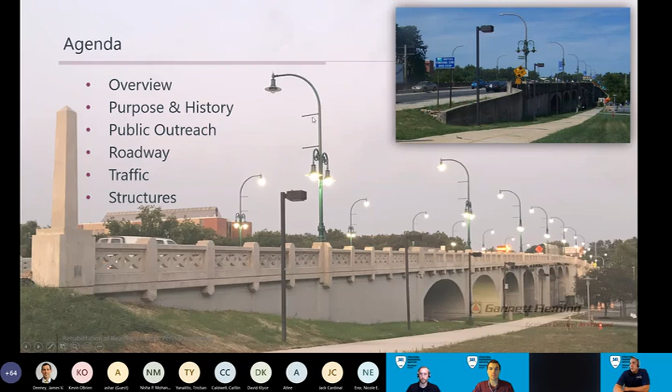So before I get into this, I just wanted to thank everybody that was involved in this. Without the help of everybody that's on this slide, and even some that aren't on here, this wouldn't have been as successful of a project as it was. First and foremost, PennDOT District 5, from the management, design, construction, inspection, everybody there, it was great in making this project successful.

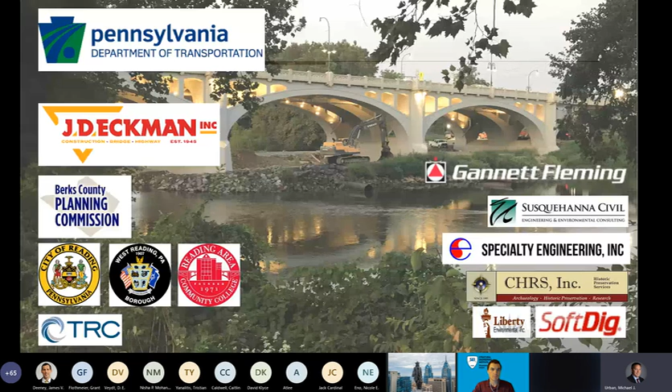For the design side on your right, Gannett Fleming was the prime, but just as important were our subs: Susquehanna Civil, Specialty, CHRS, Liberty, and SoftDig. During the planning and preliminary design portion of this project, Berks County Planning Commission, City of Reading, West Reading, and the Reading Area Community College, which is also you'll hear me say RACC, they were heavily involved in making this successful, as I said. And then onto construction, JD Eckman was the contractor and TRC was the construction inspector. I mean top to bottom, everybody, they made this project, this bridge, their own, and it showed when it was all done. So thanks to everybody for making this as successful as it's been.

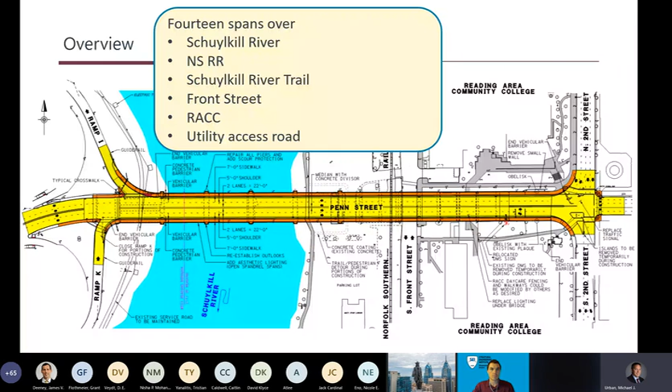Moving on to what the Penn Street Bridge is. Here's a plan view of the entire structure. It's actually 14 spans, crossing the Schuylkill River, the Norfolk Southern Railroad, the Schuylkill River Trail, Front Street, Reading Area Community College, and a utility access road.

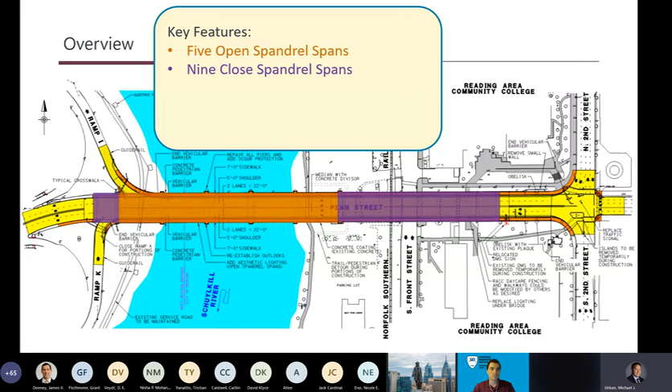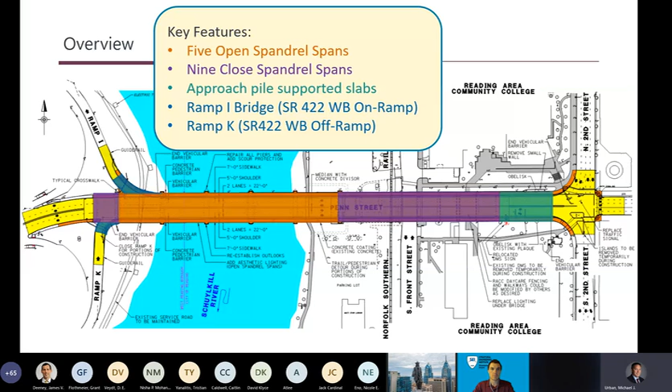The purpose of this bridge project was to rehabilitate the structurally deficient bridge to extend its useful life while preserving its character. This is listed on the National Register of Historic Places, so that was very important.

Then in 1948, after years of deterioration, they placed a gunite coating over the entire structure. They updated the roadway - there were trolleys, so they converted it just to cars. They removed the outlooks on the piers and added some drainage.

In 1958, they constructed the West Shore Bypass, which added Ramp I and Ramp K. In the 70s, they had obelisks with gaslight lamps that were removed to put in, at the time, modern light poles with overhead lighting.

And then finally in 2019, we had our rehabilitation and restoration of this bridge.

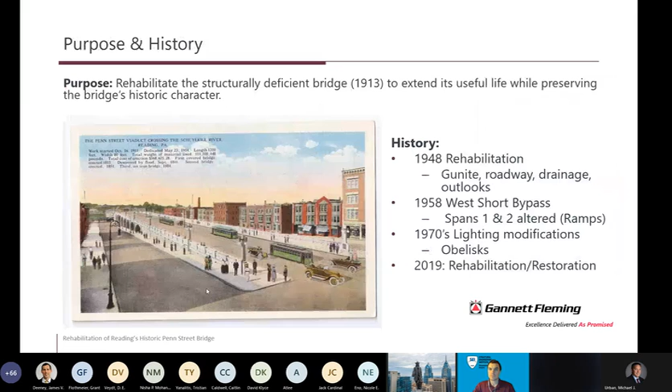As mentioned, this is eligible for the National Register of Historic Places. In Berks County, it's the oldest bridge of its type, and it's listed for the age, the type of construction, and its unique architecture. It's an open spandrel reinforced concrete arch bridge, with those 5 main spans.

Another important aspect is it has that reticulated pattern balustrade for a barrier. It has pedestrian outlooks and all the detailing on the fascia on the outside that you can see.

This bridge was part of the City Beautiful movement, which treated all the civic architecture, urban planning, and everything else to make it look nice. That's the purpose - that's why you have such a gorgeous looking bridge, and that's what they were trying to do at the time. So obviously we wanted to bring that back.

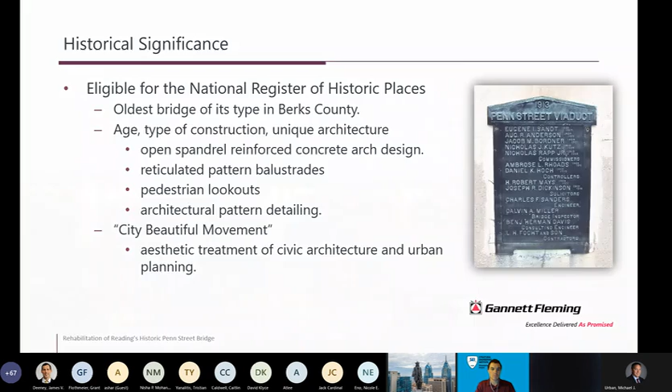In the early stages of design, public outreach was really important. There were consulting party meetings, public official meetings, and a plans display where the community could come in and see what we were doing. There were also adjacent projects - just upstream was the Buttonwood Bridge.

They also had the Wyomissing project, ADA sidewalks, lighting, and water line projects. So there was a lot going on, and we had to make sure we were incorporating our work with everything else.

One of the funniest things about this was, during design, there was actually a 100th birthday party for this bridge, where people in the community came out, had activities, had a cake, and actually sang happy birthday to the bridge. You could see how important this bridge was to the community.

They took pride in this, and from that point on we knew we had to take that into account and incorporate it respectfully into our design. We always wanted to stay on key to make sure we were returning this bridge to its original condition, while making sure everyone understood from top to bottom that this was a bridge project.

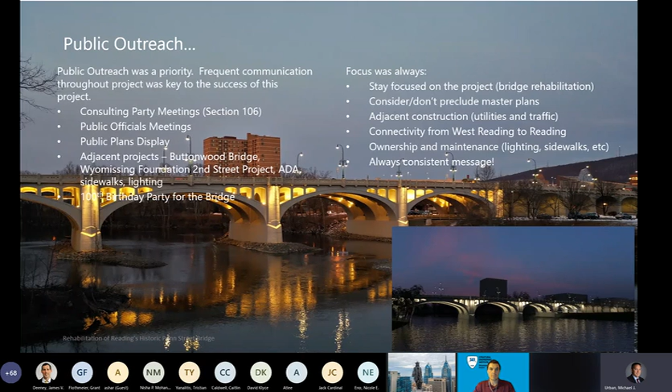Just before I skip over in the slide, when talking about the public plans display, in the bottom right you can see a rendering we did to show the lighting to the public, and the background shows the final product. It came out really nice.

When talking about stakeholder and public engagement, the Reading Eagle was the newspaper in the area, and we had a lot of talks with them. In the middle here, they had a full page spread of the bridge explaining everything going on, construction scheduling, detours. You can see in the upper left what the roadway was going to look like. It was about getting everybody involved so nobody was in the dark.

In addition, they also sent out flyers to all the residents of Reading. They wanted everybody to know that nothing was closing down, that Reading was still open. On the bottom right is one of the billboards they had, just to make sure everybody knew Reading wasn't closing down.

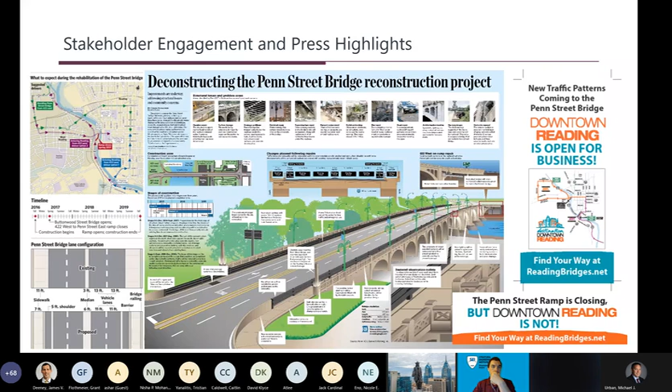Getting into the project, here's just an aerial before. Penn Street had an ADT of over 22,000 vehicles. You had the 422 interchange directly on the west side, and the 2nd Street intersection directly on the east of the structure. So this structure was flanked by the intersection and the interchange.

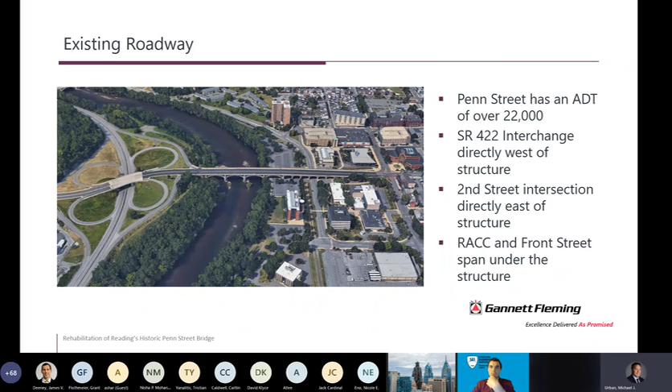It also crossed the RACC, which is on both the north and south side of the bridge over there on the east. They had parking lots and pedestrian crossings underneath some of the spans. So there was a lot of stuff going on on that Reading side.

Going into design, the existing cross section originally had 4 13-foot lanes, a 3-foot median, and 2 11-foot sidewalks. Those 13-foot lanes promoted a lot of speeding across. It's posted for 25, but with that long stretch of bridge and 13-foot lanes, you can imagine how fast people were going across.

Moving into the proposed section, one concern between consulting parties and public outreach was that they wanted some protection on the sidewalks. So in the final condition, we reduced the lane widths to 11 feet, giving us 4 11-foot lanes, a 6-foot median separating traffic, a 5-foot shoulder to further keep traffic away from pedestrians, a crash-worthy curb barrier, and 2 7-foot sidewalks.

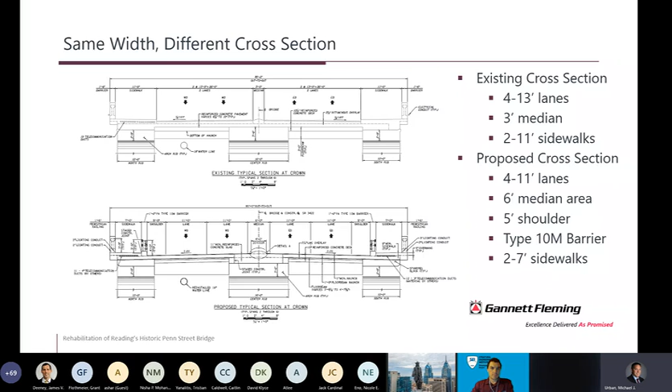That curb barrier allowed us to use a non-crash-worthy pedestrian barrier, which was the original design on the bridge, because we had to protect pedestrians while also having a crash-worthy barrier. Those 5-foot shoulders are wide enough that in the future they could become bike lanes, though at the time there were no facilities on either side of the bridge. We're not precluding those, and this way it's easy to stripe, and all the inlets have bicycle safety grates on them as well.

As mentioned, there was a lot of traffic. This is the main route into Reading from 422, so a lot of traffic, a lot of people going in. We had to do a study to determine how we could rehab this bridge and still maintain traffic. It was decided early on that we needed to maintain 3 lanes, so we had to knock one lane off. To do that, we took out ramp K, the off ramp of 422 onto Penn Street going in.

So we had 2 detours. One was further south prior to the bridge, and in case people not near the area missed that, we had another detour further north where they could come back around through West Reading and get back to the bridge. Again, it was about making sure everybody could get across where they needed to, and thinking ahead. Throughout, there was also some modification of the signal timings.

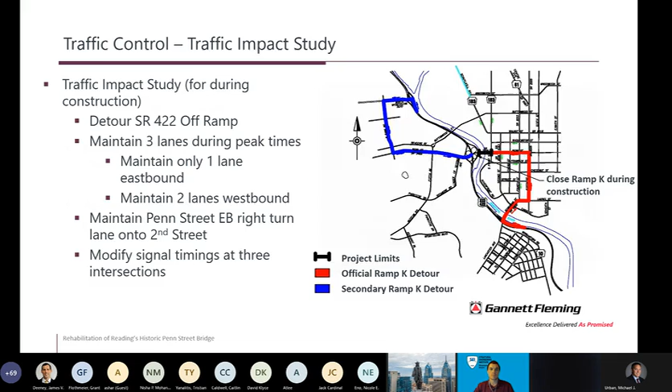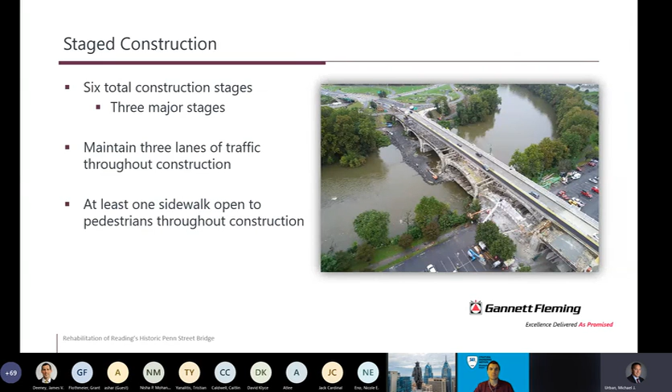So as I mentioned, once we took out that 1 lane, that gave us the ability to have staged construction. There were 6 total construction stages, 3 of which were the major stages: the north side of the bridge, the south side, and then right down the middle. A couple of the stages in between were just prep for those. The whole time we had to maintain 3 lanes of traffic throughout construction, and we always had to have at least 1 sidewalk open to pedestrians.

So then moving on to structure, you can see that this bridge was in pretty bad shape. What you're looking at here is the shotcrete or gunite coating that was placed on in the 50s, used to repair the deteriorated concrete. In some locations that was up to 4 inches thick and as thin as maybe half an inch, where it ended up being like a skin coating. So it varied in thickness.

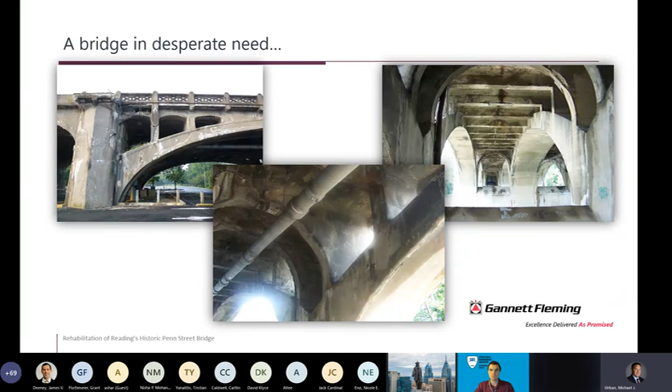After time, that started to fail. Water was trapped, and you can see in the upper left where that gunite had failed and come off, and then the original concrete had further deteriorated. Also note on the pier there, that is one of the outlooks, and when they closed that off, the outlook itself remained - pedestrians just couldn't get access to it, and all it did was collect dirt and debris, and weeds grew, and people assumed it was built that way as a flower pot. So again, not the intention, and the idea was to bring that back. There was a water line on there, and just lots of spalling, cracking, and everything.

Then moving on to the closed spandrel spans, again same thing - you can see the cracking, the deterioration, the leaking. You can see by all the efflorescence there was water behind there. This in the center is the picture of that chamber span - it's pile supported slab with the walls. It was an inaccessible span, and then I believe in 2003 they added that access door to finally get access to that chamber span so they could inspect it. In the back of that picture you can see that retaining wall that was put in, but just a lot of cracking of the gunite and everything.

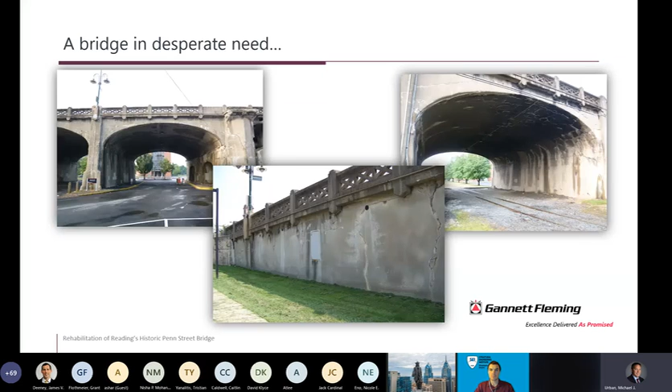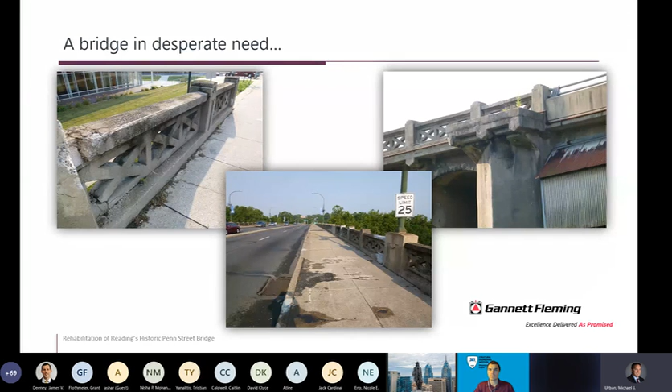And then on top you can see the barrier there - cracking, spalling, typical of what you'd think of a 100-year-old concrete bridge. There's some locations where the barrier was actually leaning and had to be held up. The sidewalk had patching, cracking, heaving, same thing. The asphalt roadway had cracks and wasn't level. So a lot of stuff that needed to be rehabbed. And as I mentioned, you can see our flowers, our weeds growing in the flower box right there.

And then the ramp I structure on the left, it was a 2-span monolithic T-beam structure that they added for ramp I, and the picture on your right is just a top view of that. And then, as you can see, the asbestos-covered Verizon fiber optic lines that could not be disrupted during construction, going right through the hammerhead pier, and then into the abutment. So all those then went up into span 2 onto Penn Street and was in the northern sidewalk there. So Grant will talk about that, everything we had to deal with those Verizon lines.

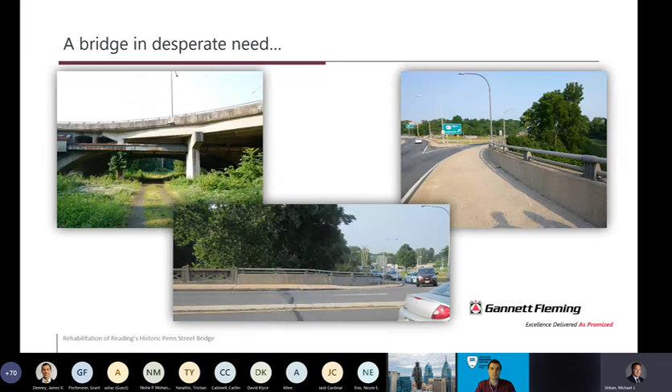And then in the bottom picture there, that's ramp K. If you look closely at that metal railing, you can see how ramp K actually settled because they put a retaining wall to close off span 1, and the soil behind it settled, and you can see how the barrier settled as well. So a lot of stuff going on for this.

So at this point, I'm going to hand it over to Grant, and he'll talk about the actual rehabilitation.

Okay Mike, I'm going to try to get my slides up here. If you can let me know if you can see them. Yes, sir. Awesome.

Okay, thank you, Mike. I'm just going to talk about the general approach and strategy to the rehabilitation of the Penn Street Bridge, then move on to some interesting aspects of the design and go through the construction of the rehab. Early in the project, we did an in-depth, hands-on inspection of the structure to determine the extent of the rehabilitation and then develop a strategy from that.

Since the bridge was historic, our goal was to save as much of the original structure as possible. But during our inspection, we found a lot of elements with advanced deterioration that would have to be replaced. Those happened to be pretty much the whole top side of the bridge, which had to be removed and replaced, including the deck, floor beams, jack arches, railings, sidewalks, and existing lighting.

The lower portions of the bridge—the arch ribs in the open spandrel arch spans, the spandrel columns—could be salvaged, and so could the arch barrels in the closed spandrel spans, the spandrel walls, and the piers. They had enough capacity, and pretty much just had to be rehabilitated with concrete repairs.

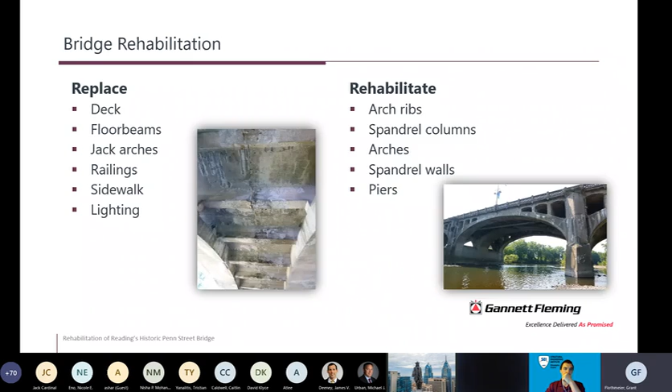One of the unique features of the Penn Street Bridge is that in the open spandrel spans, the deck slab had no expansion joints. This was an unusual feature for this type of bridge—no other bridges in the area had this no-expansion-joint condition. When we did our in-depth inspection, we found no evidence of thermal damage to the deck or other related elements due to thermal expansion and contraction.

So we determined that we wanted the new, proposed deck to also not have any expansion joints, to match the existing condition, but we wanted to design it to modern codes and account for thermal expansion and contraction and all the forces that go along with that.

Our analysis determined that tensile forces in the deck were the critical forces. Pretty much, when the bridge cooled down and contracted, the piers were rigid and the arch was pretty rigid. There would be some elastic shortening of the arch with cooling and contraction, but the arches were pretty stout, so that was minimal and negligible.

Pretty much what would happen is as the deck tried to contract, the piers and the arches would hold it in place, and large tensile stresses would form in the deck due to the contraction of the bridge. This was relatively easy to design for when it came to tension and moment design—we had pretty heavy longitudinal reinforcement in the deck.

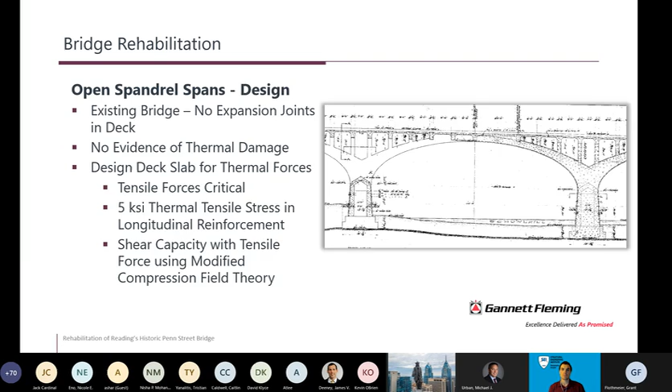The open spandrel spans consisted of 3 arch ribs: 2 exterior arch ribs that were 10 feet wide, and 1 interior arch rib that was 16 feet wide. To keep the lanes on the bridge open, we shifted traffic during construction to 2 of the arch ribs, and had to do analysis of the arch ribs to make sure they could handle the loads in this temporary condition, which they could.

Some of the floor beams, which exhibited some pretty severe deterioration, had to be temporarily supported during these stages in locations where the deterioration affected the capacity significantly.

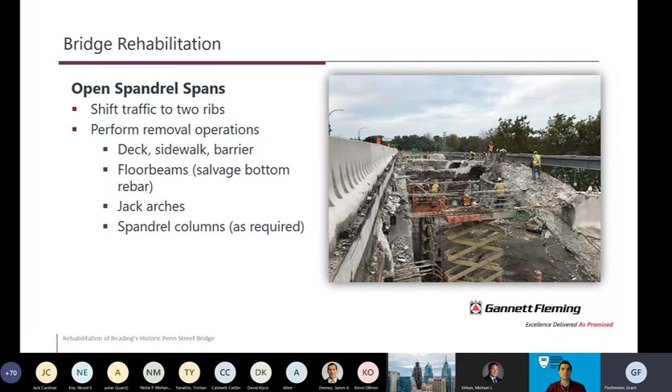But once the traffic was shifted to two arches, we could proceed with removal of the deck, sidewalks, and barriers on the top side of the bridge, as you can see here.

We also removed the floor beams, but we salvaged the bottom reinforcement in the floor beams. The reason we did that is that those bars were embedded in the existing arch ribs and spandrel columns, and keeping them there, we could tie the new floor beam reinforcement to those existing bars and have a good positive connection between the existing structure and the new floor beams.

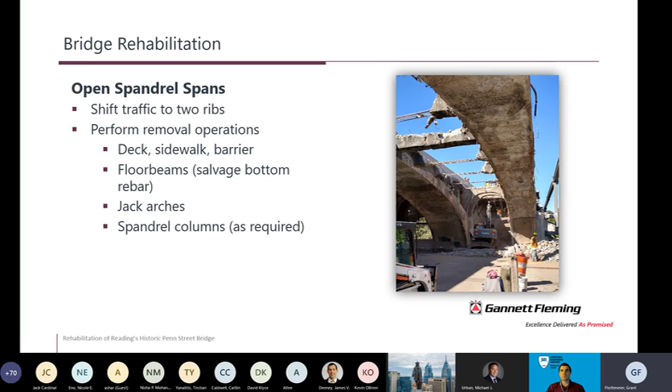We also removed the jack arch and then select spandrel columns. The spandrel columns that we removed were selected in the field. When the gunite was removed, we could really assess the concrete underneath, and we found that there was a bunch of spandrel columns that needed to be replaced fully, and we had a detail on the plans to do that.

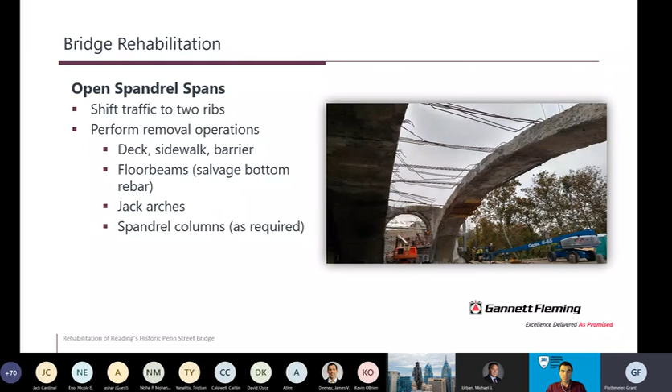So once the top side of the bridge was removed, as you can see here, we could perform concrete repairs on the arch ribs and the piers.

We actually, when the contractor was out there removing concrete, they were actually digging pretty deep into this rib. And we had to stop removal and come up with a strategy and sequence to actually do the repairs on this arch rib without destabilizing it at all. So we came up with a strategy and repaired that.

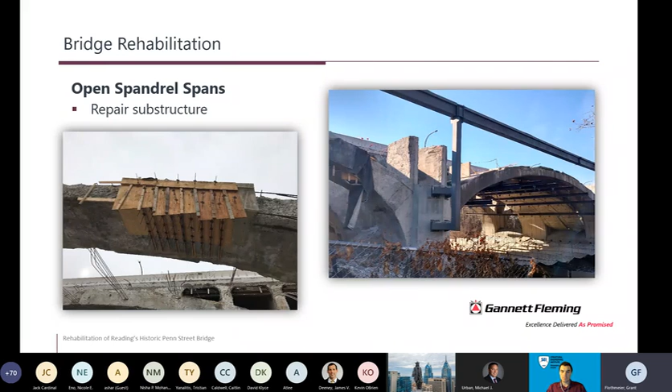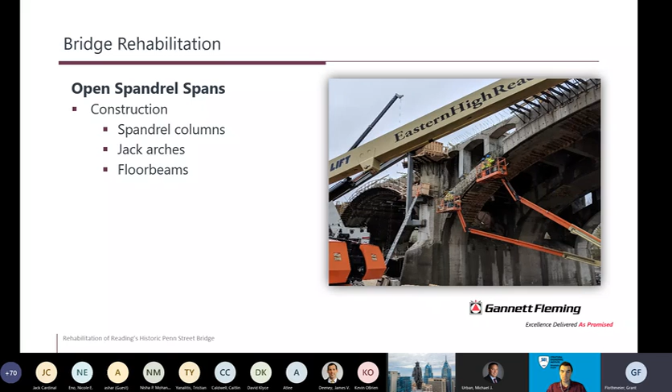So once the concrete repairs were being done, we could reconstruct the spandrel columns and the jack arches. As you can see here, one thing we added back was the scoring on the outside face of the arch ribs. This was a detail that was on the original arch ribs, but a lot of these score lines were deteriorated away or covered in shotcrete. So we added them back onto the rehabilitated arch ribs.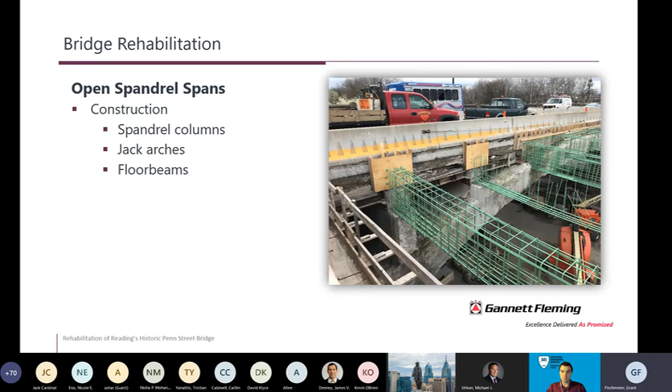And then we constructed the new floor beams. Here are the rebar cages for the new floor beams. You can see what we did is we tied the existing bars that were projecting from those spandrel columns and arch ribs to the new rebar cages, creating a good positive connection between the existing and new floor beams. Then we cast the floor beams in place, maintaining a lot of the original details, like the chamfers at the top of the floor beams, matching the original bridge.

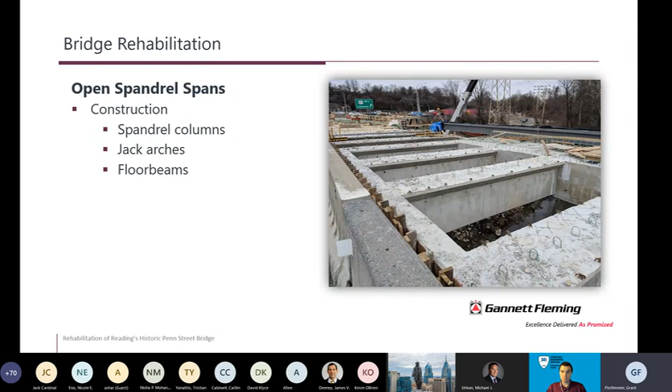And the floor beams were made composite with the deck slab. And since the bridge was historic, we had to use removable forms on the deck slab, as you can see here.

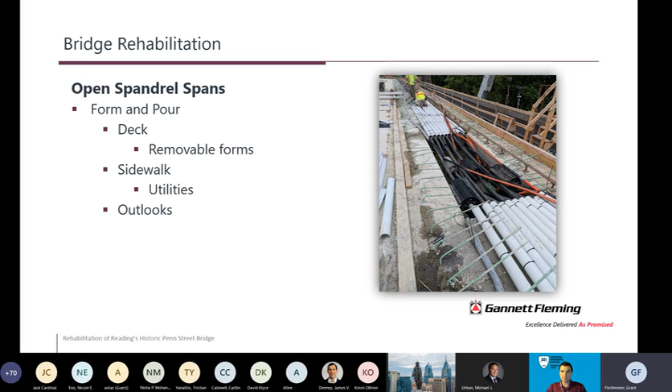So here are the utilities in the sidewalk. They were moved from that temporary bridge onto the new sidewalk, put in new split conduits, but there were these large splices in the conduits in the middle of the bridge, which we had to accommodate. The way we did that is we designed one of the jack arches to have what we called a utility splice vault - a large pocket in the jack arch that we could house these splices in. After the sidewalk was cast, we have access panels now so people can get in and work on these splices if they need.

Here are the outlooks. As Mike said, these were closed off in a previous rehabilitation. We reconstructed them. And here you can see the conduits - those are conduits for the bridge lighting on the top side and below the bridge that ran through the pedestrian barriers.

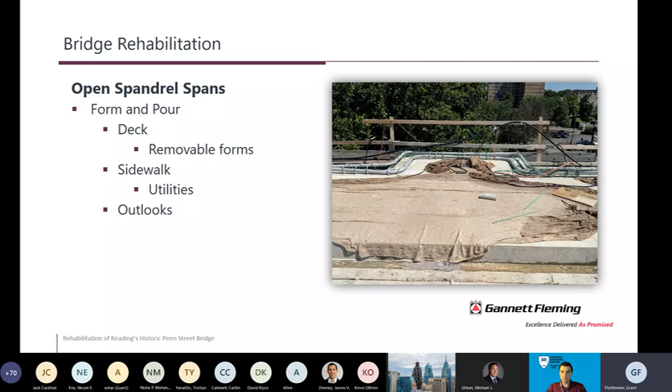Moving on to the closed spandrel spans. The first step in their rehabilitation was to remove the existing asphalt roadway and concrete slab, exposing the original dirt fill.

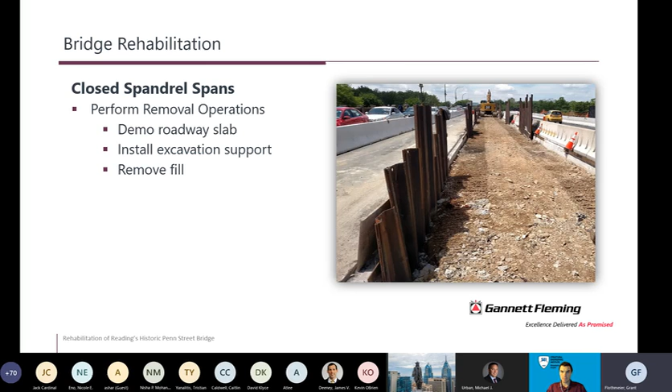We drove sheeting through the fill down to the top of the existing arch barrels, matching the profile of those barrels. Once the sheeting was installed, the fill could be removed. When they reached the arch barrels, the sheeting was anchored to the top of the arch barrel, creating good temporary support for the fill on the other side. Traffic was actually pretty close, with a barrier right adjacent to that sheeting.

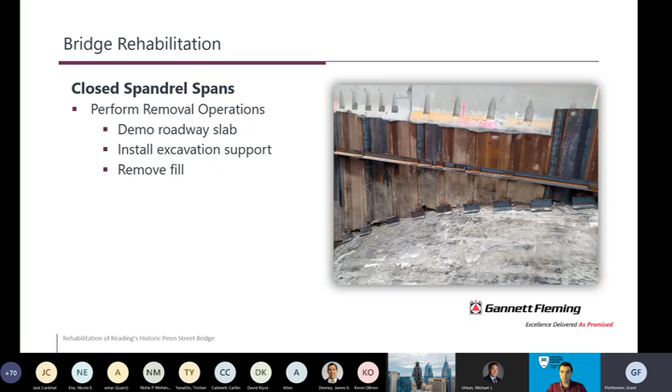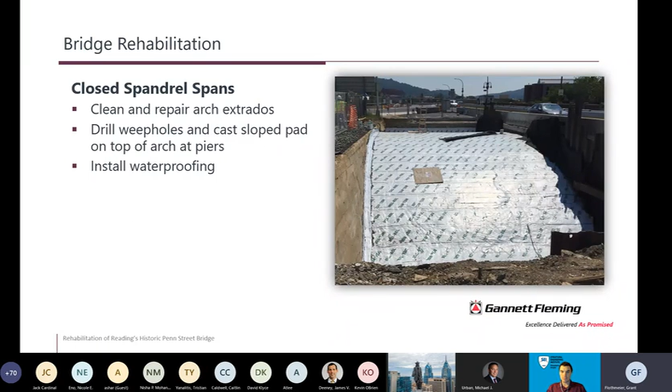Once the fill was removed, we could clean and repair the top of the arch, and new weep holes were drilled at the base of the arch. Along with the weep holes, a sloped concrete pad was constructed to promote drainage from the base of the arch to those weep holes. Then waterproofing was applied to the top of the arch and to the inside faces of the spandrel walls.

To fill in on top of the arch, we used cellular concrete fill, which had a number of advantageous properties. First, it was lightweight, which helped balance the new and existing proposed loads. The proposed loads were slightly higher, so the lightweight fill helped balance everything out, avoiding overstressing the existing arch or adding weight to the foundations.

Another advantageous property of cellular fill is that it's permeable, so any water that leaked into the fill would drain directly through to the weep holes drilled at the bottom of the arch barrels. This way, it avoided any water pooling above the arch.

The third advantageous property was that it was self-supporting, which came into play with the staging. When traffic was moved back onto these portions of the bridge, the cellular fill could hold up the traffic loads without requiring any additional temporary excavation support. It could self-support the traffic loads pretty close to the edge.

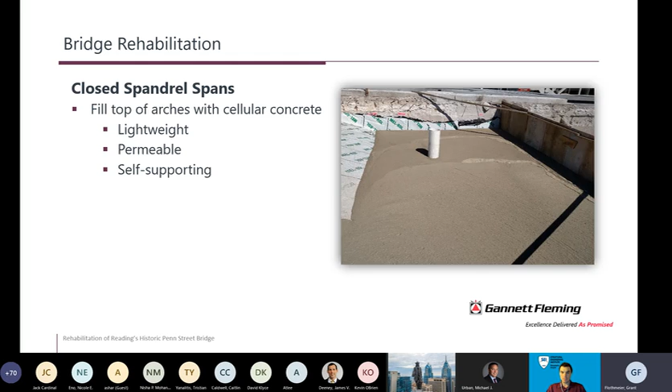Once the fill was put in, full width concrete moment slabs were constructed and the sidewalks were built on top of the closed spandrel arches.

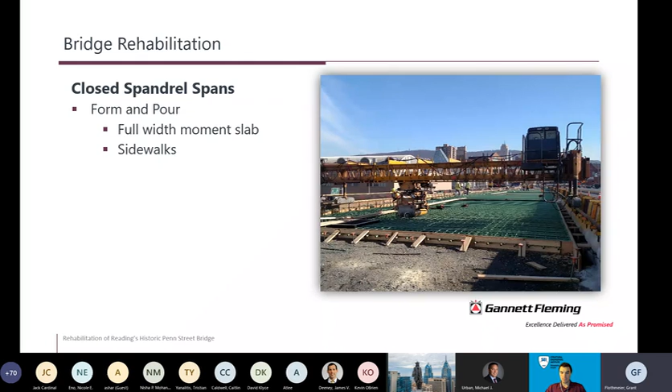To recreate the balusters, a combination precast and cast-in-place system was used. We used precast panels for a few reasons. One, it reduced construction duration since they could be cast on site while other work was going on, ready to go once the barriers were ready to be constructed. Another reason is that it ensured a quality product.

The contractor closed off one of the closed spandrel spans with plastic and created a little fabrication shop below that arch span, where they had reusable forms to cast these panels.

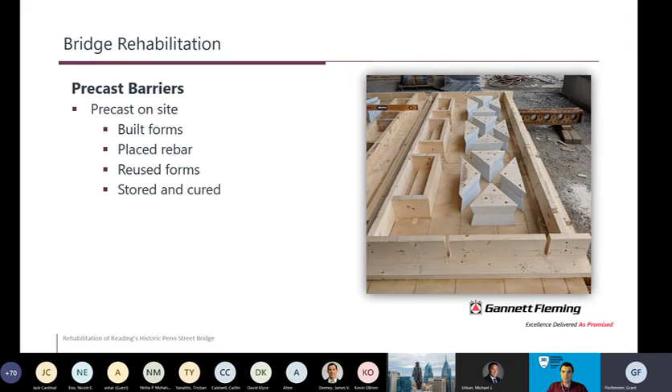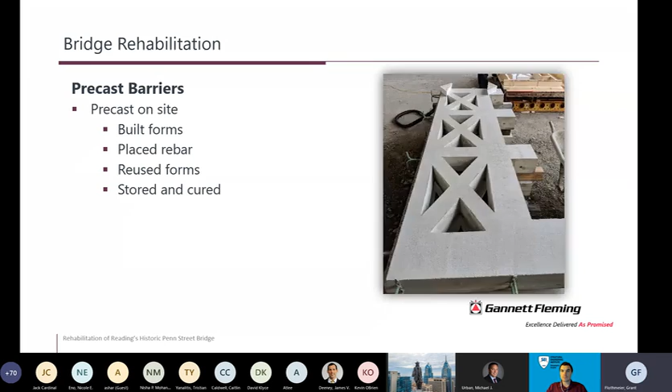Here you can see the panels on the floor. They tied the rebar in there, then poured the concrete, and these are the completed panels—concrete finish and very accurate in the detailing. They could form these almost like a production line and store them on site, so when the barrier was ready to be constructed, the panels were ready to go.

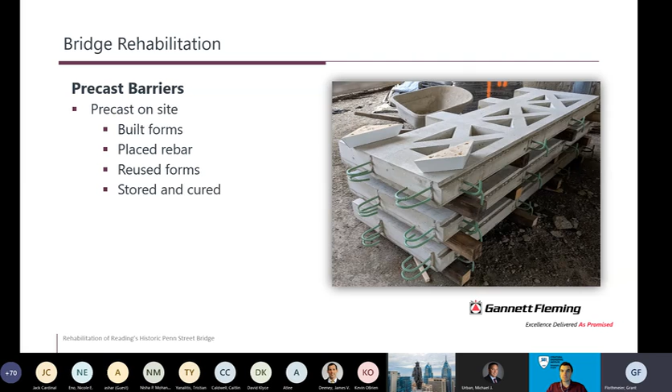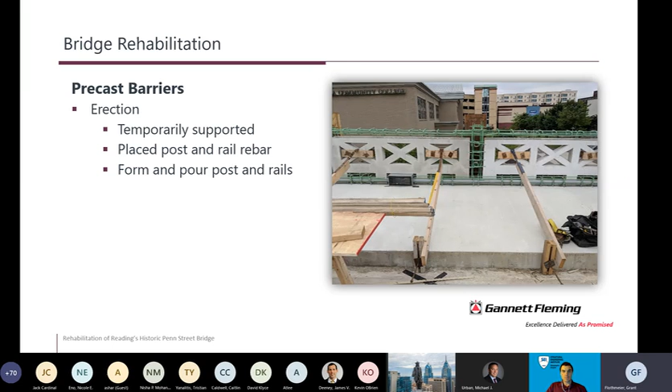Here are the panels in place. They had little legs so they could be placed on the sidewalk and only needed to be braced laterally. They had bars projecting from them which tied into the cast-in-place bars for the railings, posts, and curbs.

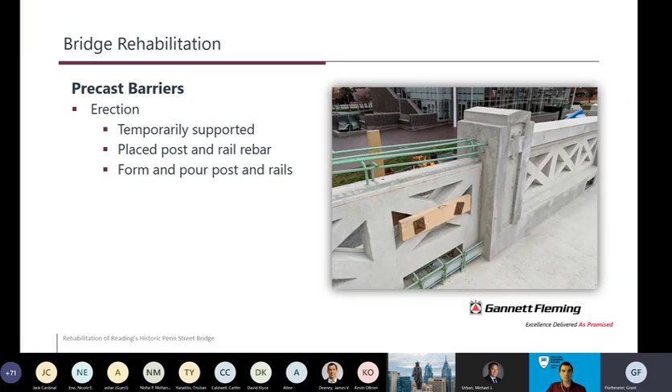Once all those bars were tied, the cast-in-place portions were cast around the panels, locking everything together. Here you can see one of the posts—all the details match the original posts, as do the rails and curbs. Here's the finished product; it actually turned out really well and closely matched the original barriers.

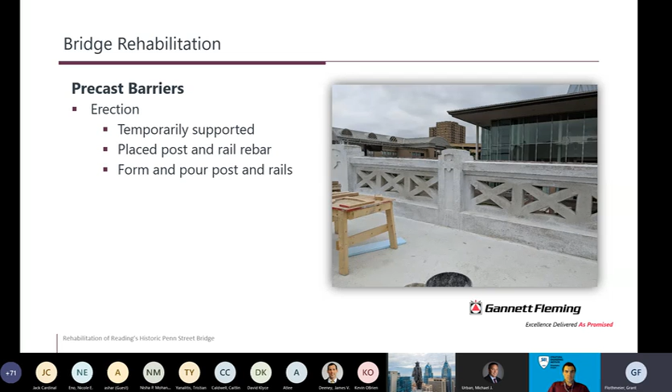Span 1, as Mike mentioned, was the closed spandrel span at the west end of the bridge that became enclosed with the construction of the 422 bypass. When the ramps were built, retaining walls were placed on either side of the closed spandrel span, and the only access to the span was through openings in the pier. This was a problem for inspection—it was a confined space, and we really wanted to get rid of it.

It wasn't really a necessary span anymore, but since it was historic, we decided to fill in the span with cellular concrete instead. We closed off the openings and pumped cellular concrete below and above the arch barrel, so the historic arch barrel is still there—it's just filled in.

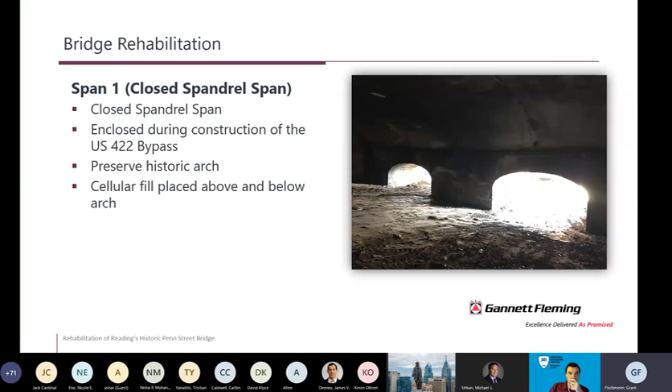And we had a similar approach to the chamber span. This again was a confined space, so it wasn't easily accessible for inspection. We filled this in with cellular concrete too.

We reused the sidewalls, and one of the interesting things, you can't see it in this picture, but there were actually cobblestones from the original road that came down from the city to the river here. So we wanted to preserve those historic cobblestones.

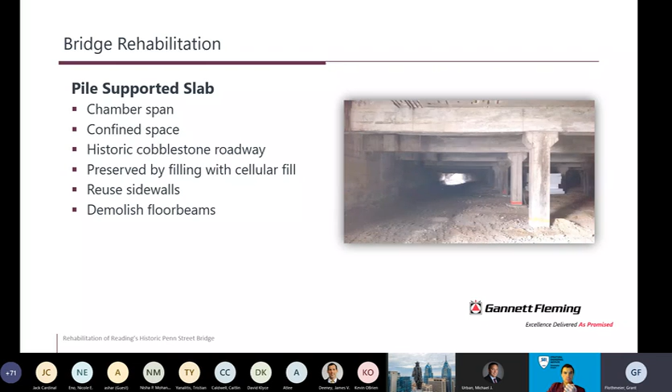A layer of geotextile was put over them, and then the cellular concrete fill was put in on top. Once the cellular concrete fill was put in, the floor beams were removed. We didn't want any hard spots, floor beams with cellular concrete underneath, and we didn't want any cracking of the roadway above, so those floor beams were removed. The whole thing was filled in.

So onto the ramp I structure. As Mike mentioned, this was a 2-span concrete T-beam structure that was built in the 50s to accommodate an off-ramp from Penn Street onto 422 westbound. And the existing superstructure did not rate for current legal loads, so we had to replace the superstructure.

The substructure, however, could be salvaged with minor modifications. One of the things we had to work around, as Mike mentioned, were these conduits that ran underneath ramp I, through the pier and through the abutment. These had to be maintained during construction - they're the same conduits that came in on that utility bridge on the main span. And to make it more difficult, the conduits were asbestos containing, so they had to be shielded during construction so those asbestos conduits wouldn't be damaged.

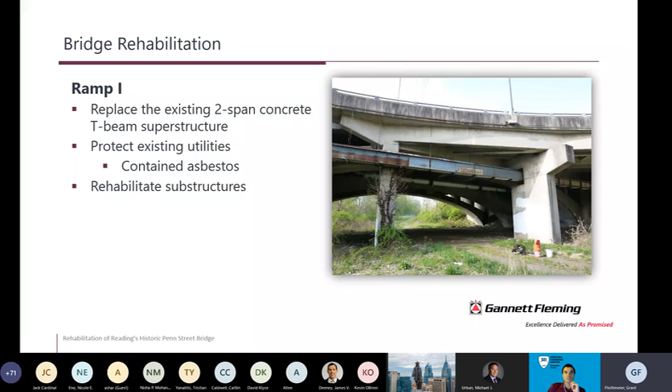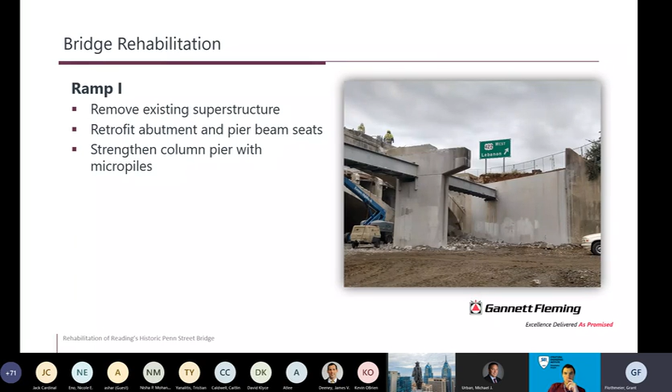So here's the existing superstructure removed. We made some minor modifications to the beam seats to take the new superstructure. And the only substructure unit that really required any strengthening was the footing of the column, which was at the east end of ramp I.

The new loads from the new superstructure overstressed some of the existing piles. So what we did is we drilled holes through the existing footing and installed micro piles, which were then cast into the existing footing, providing additional capacity to resist the new loads.

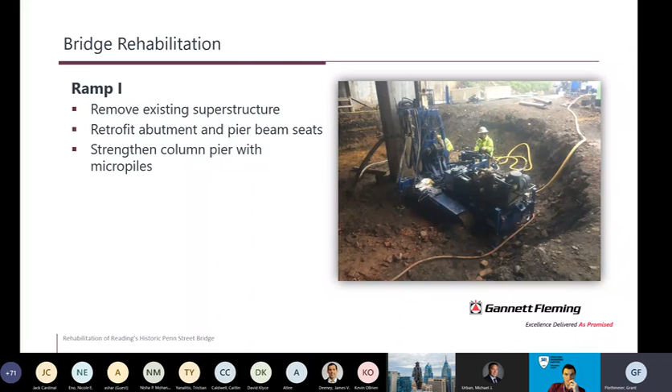So ramp I was a quirky little structure. As you can see from this framing plan here, it was triangular in shape. It only had one abutment - the beams were supported on one abutment on one side. There was a hammerhead pier that came off perpendicular from Penn Street, which supported two of the girders. And then there was a header beam that ran parallel to Penn Street that supported the girders along that face.

It had severe skews, varying skews, required a substringer that tied into the fascia beam at the east end of the bridge. And one of the interesting things, we used steel girders here to minimize the weight, but it wasn't strength that determined the size of the steel girders - it was actually the geometry.

AASHTO and PennDOT have a provision that says the steel beams have to be greater in depth than the overhang is in width. Based on this geometry, we needed 36-inch deep beams to meet that criteria. Even with the lightest W36, the capacity was still far greater than what was required for ramp I. It was actually advantageous because with these beefier sections, there was less deflection, so differential deflections between the girders weren't as severe - they were actually minimized based on that.

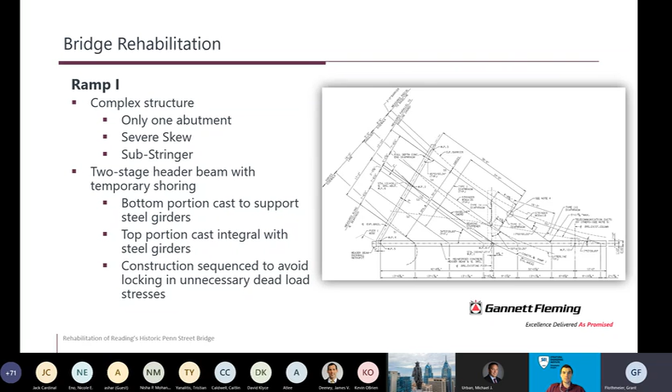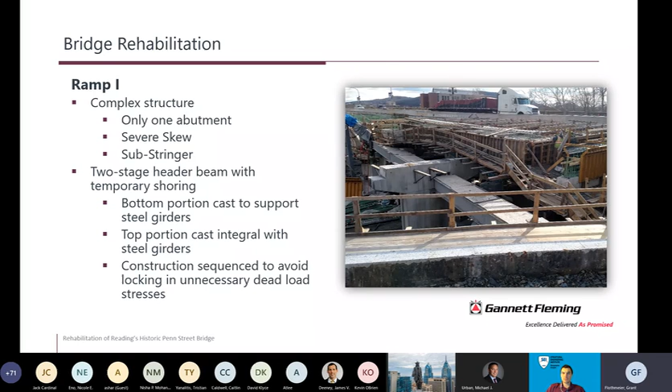Here's another picture from the top side of ramp I during construction, with the shielded utilities. I believe the header beam is being cast there in all that formwork.

Here are the steel girders in place. It's hard to see, but you can maybe see the steel girders sitting on top of that bottom portion of the header beam. The ends of these girders were then cast into the header beam.

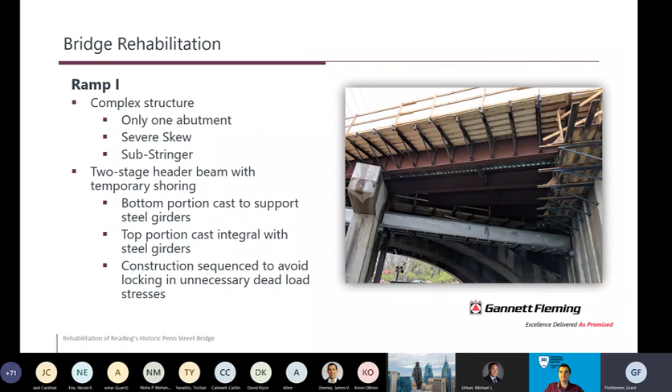Here's Ramp I in its final condition on the top side. The deck, the sidewalks, and the barriers were poured. One thing to note is the barrier here.

We could not put a crash-worthy barrier at the sidewalk on Ramp I. So what we actually did is we had a 2-foot thick crash-worthy barrier on the outside face, but we used form liners on that barrier to match the aesthetics of the pedestrian railing on the main line.

One thing we did add, we have a strip seal along the interface between the Penn Street Bridge and Ramp I, and this was to create some separation between the two structures.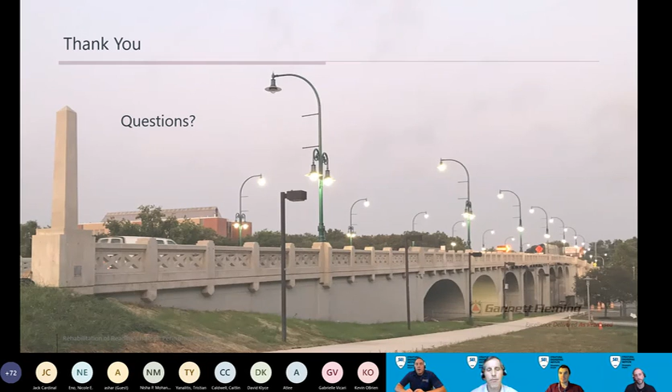I think everybody was involved from the beginning. We actually had the consulting party meetings, we had other meetings within the city. Same thing, don't forget West Reading as well. They were on the other side, but I think they were just as involved, even during construction. We always had, during our project control meetings, a rep from West Reading and Reading there to go over the project. Honestly, it's just the constant communication throughout the project that made this successful, so everybody always knew what was going on, so there were no surprises, no hiccups. I couldn't say there was anything wrong with the coordination.

Was the RACC pleased? Yes, the RACC was. Again, they were always at our public coordination meetings. When Grant and I went out to do the inspection, in the beginning during PE and final, we always let them know. They were very helpful. When we did the lighting, they were always out to help us with everything, just get access to panels. It was just the same thing - they said just keep us posted, we don't care what you do, just keep us posted, if you're going to come out just let us know. And then during construction, we worked with them.

There were a couple things to fix, but the contractor was very responsive, and PennDOT was very responsive to that. We closed off the connection between their campus and the parking lots, but whenever we did those closures, we tried to do it during summer. We always tried to maintain access from both sides - there was always one of the spans open during that.

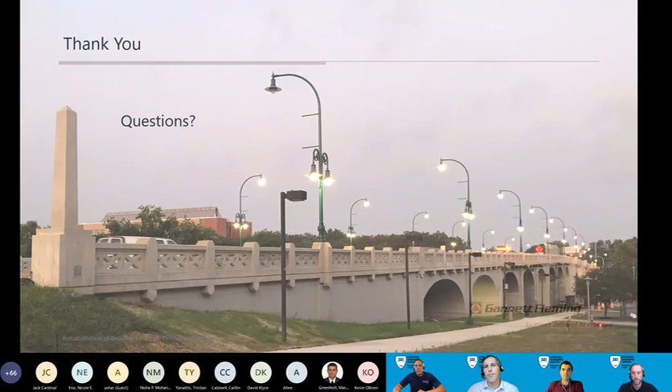I think that's it for questions, and I think we just hit about our time. So, James?

Yes, Mike, thanks a lot. Everybody, just give me 2 minutes real quick.